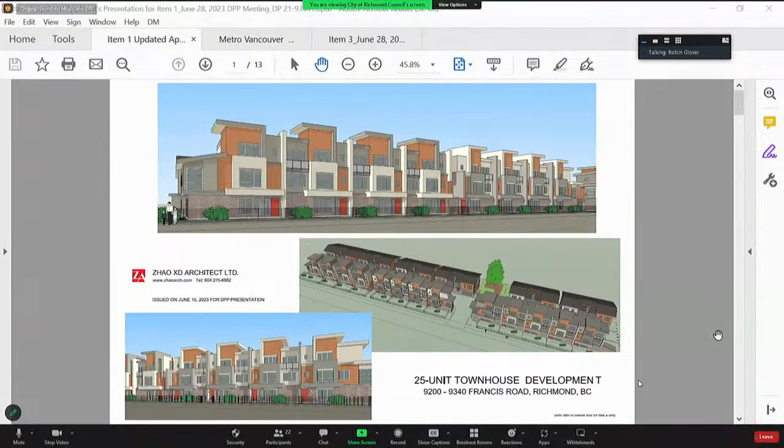Yes, this is a 25-unit townhouse development facing Francis Road, an arterial road. A driveway access is directly from the street, connecting to an east-west internal driveway. The entry driveway lines up with Heather Street on the north, across Francis Road. There are 9 buildings: one is 5 units, 2 buildings are fourplex, and 6 buildings facing the rear yard are 2-story duplex buildings, with proper setbacks and building heights to match the single-family neighborhood on the south. The rear buildings adjacent to the single-family neighbors are designed at 2-stories within a 7.5 meter distance, creating a good transition between the development and the single-family neighbors. A sun shading diagram was made to ensure there's not a big impact on neighbors, and there will be quite a lot of sunshine for the outdoor amenity area of the development.

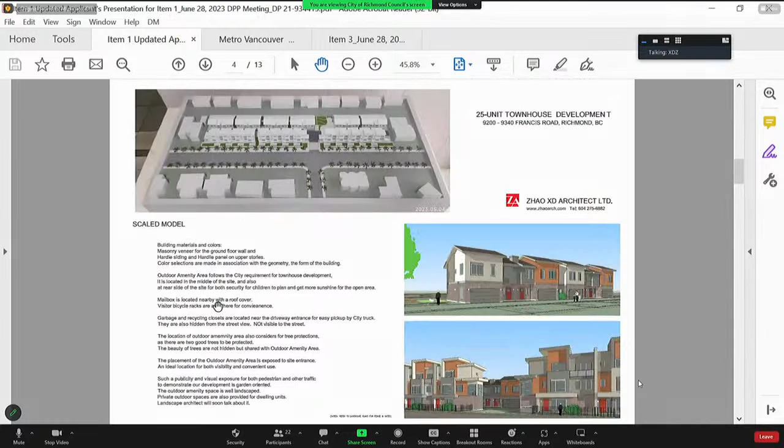The architectural character matches the existing neighborhood, emphasizing the residential building character in both building massing and details. This is a model, the scaled model. We're doing studies for the massing. That's the material we're using.

We introduce also some masonry and Hardie products, so it's a mix for the composition. This is the facade, the front facade.

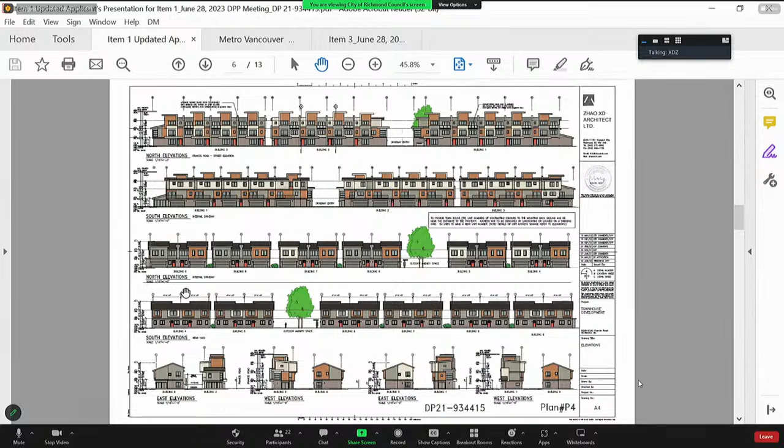Repetition of the units as well as variation to add some breakups to the repetitions. Repetition of the townhouse units allows the function to express the function of the building. It also creates a rhythm of architecture expression along the street front. Variations with different color and change of detail are well considered for this exterior street frontage. The upper portion of the building and the roof line follow the same design expression with repetitions and variations, for both the rhythm and some breakups for interest.

We did some shadow studies. This is the shadow. We make sure there's no big impact to the neighbors, and it's good. We receive all sunshine within the development site, particularly for the amenity area, so we have quite much sunshine.

Building material. Building materials and colors will include masonry veneer for ground floor walls, Hardie siding, Hardie panels on the upper story. Color selections are made in association with the geometry, with the form of the building.

The outdoor amenity area follows the city requirements and guidelines required for the townhouse development. It is located in the middle of the site, also at the rear side of the site for both security, for children to play, and to get more sunshine for the open area. The mailbox is located nearby with roof cover above.

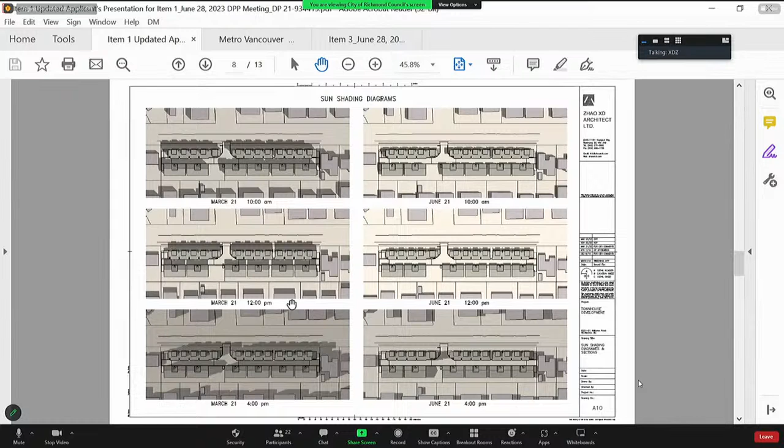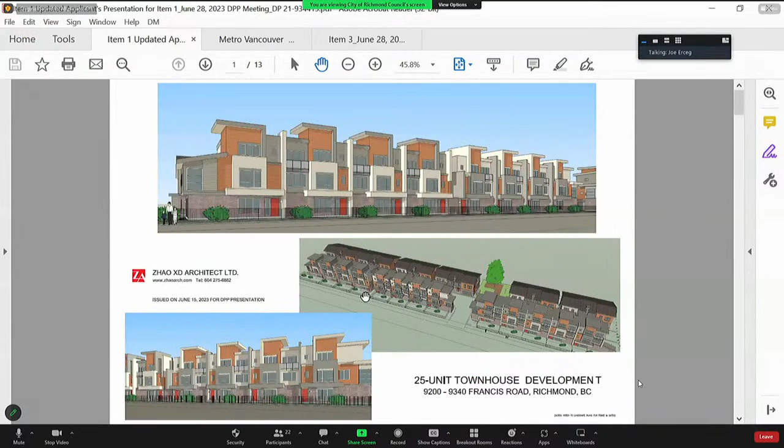This is the first page, referring to the first page. I would appreciate if, when you're talking about the amenity area, you show us a site plan showing the amenity area. When you're talking about tree retention, show us where the trees are that are being retained, and not be jumping around showing us images we've already seen.

Yes, it's here. This week we spent quite much time to protect and preserve these trees. Also with the engineering, as we had an issue because of the upgrading of the utility easement, which impacted the protection of the trees. So we incorporated with the city engineer and used special techniques, and we can still have these trees well preserved, also with the expertise of the arborist. So these trees are defined very clearly with the fence and in association with children's play equipment, to make sure the tree roots will be protected. This will be presented by the landscape architect later on.

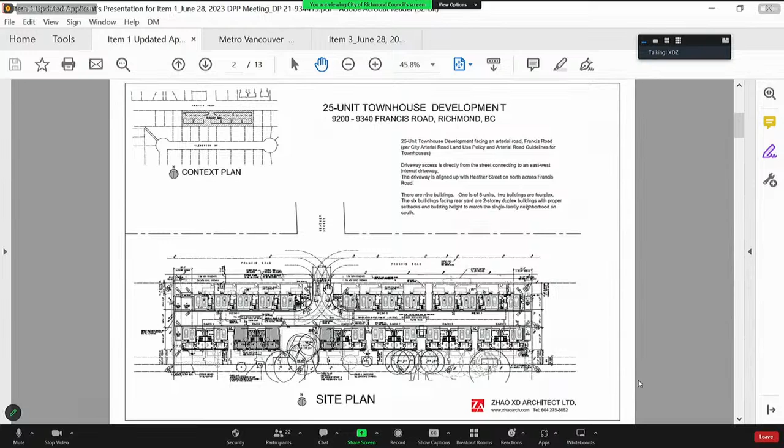Yeah, okay. So does that conclude your part of the presentation?

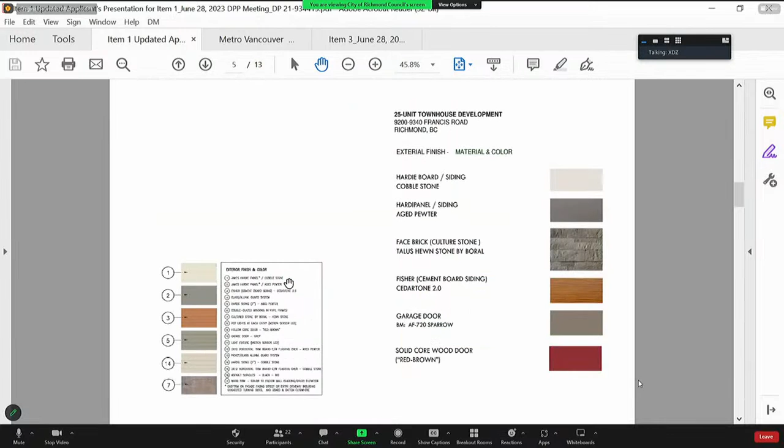Okay, thank you. We do have a pretty comprehensive staff report that outlines all of that. My suggestion for future presentations would be to align what you're speaking to with the images you're showing at that time. Yes. Thank you. Thank you.

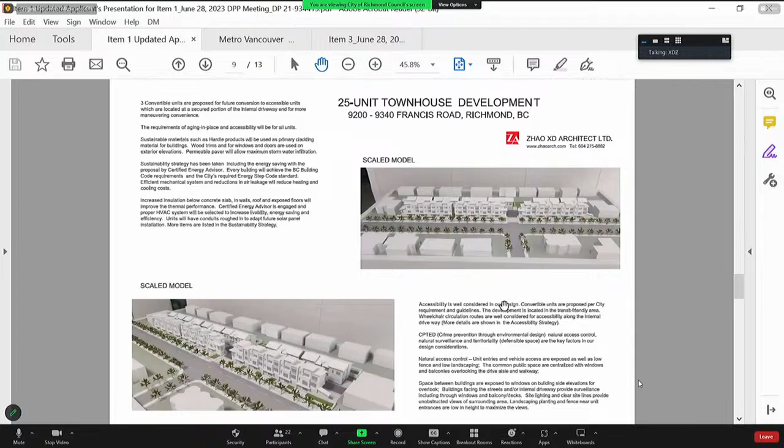This is a townhome development project. The first thing we are thinking is the street-oriented unit, how to provide a decent amount of space for each unit, like the 2.4-meter wide patio, the large open space, and the buffer planting between the frontage fence and the sidewalk.

The second major thing we look into for this project is tree protection, because on the south side of this development we have a whole bunch of very large existing trees. We will try to protect and preserve them, working together with the project arborist and the city staff.

Also, because this is a development project, we need to provide age-friendly amenity space for the residents. 50% of the amenity space is dedicated to play area. We worked with the project arborist to get a robust play structure on the side, but also away from the critical tree zone, so it's not affecting the existing trees.

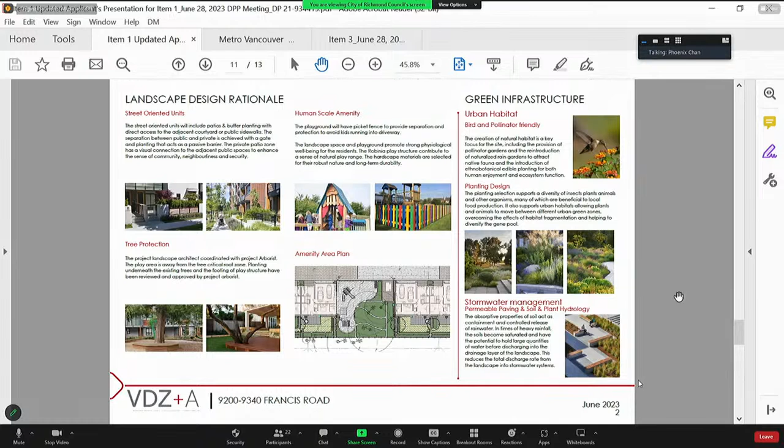You can see some precedent images for the entry pathway, and some feature paving for the patio, for the entry, and some areas between the houses. They are kind of dark, but we still try to propose some landscape features like boulders and river rock as decoration.

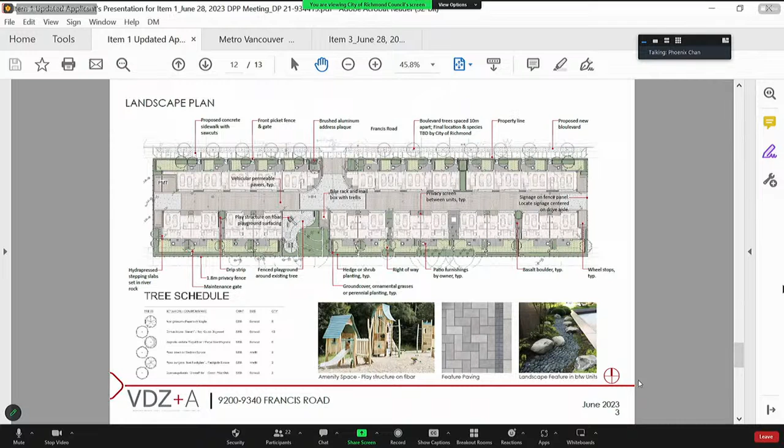Next slide, please. This is some of the precedent imagery we proposed for this project - the paving material and bike racks, the lounge seating, the trellis, and the entry signage you can see in some of these pictures. We also have a planting palette, which we coordinated with the horticulture technician to ensure biodiversity and bird and pollinator friendliness.

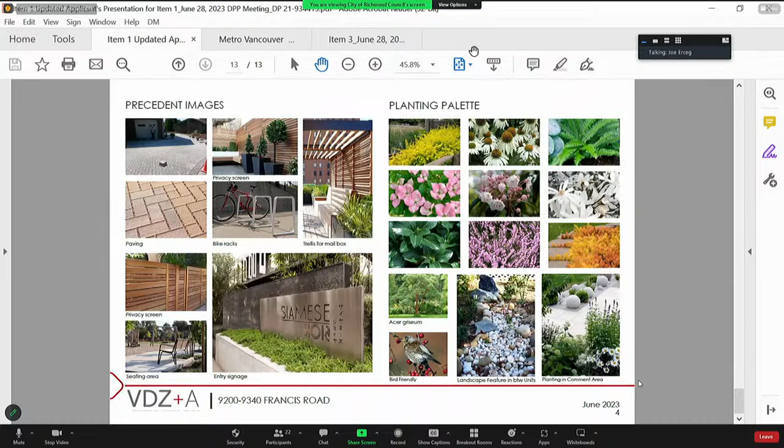That's all for the landscape. Thank you. Okay, thank you for your presentation. Are there any questions for the panel? No. Okay, Mr. Craig, do you have staff comments for us?

Yes, thank you, Mr. Chair. Just a few comments. There is a servicing agreement associated with this project. That servicing agreement involves frontage works along the arterial road, city utility upgrades as referenced during the presentation. The utility upgrade along the rear of the property involves special techniques being used in order to save the trees along that rear property line.

The servicing agreement will also provide for site services. The driveway will be secured by way of statutory right-of-way in order to provide future access to adjacent sites should they redevelop in the future. There are 9 trees being retained as part of this development - 3 in the outdoor amenity space and 6 along the rear property line.

The development is being designed to achieve energy level step code 2, with the introduction of low carbon heat pumps for heating and cooling of the residences. There are also 3 convertible units included in the project. Happy to answer any questions. Okay, thanks. Are there any questions for Wayne?

Cecilia, I haven't heard anything about the lighting for this development. Can somebody just address that? And secondly, just a comment - I heard the landscape architect say we're going to try to protect the trees. No, you have committed to protecting the trees, so please do more than try. Yes, sorry, we are protecting that. Thank you, and somebody talk about the lighting, please.

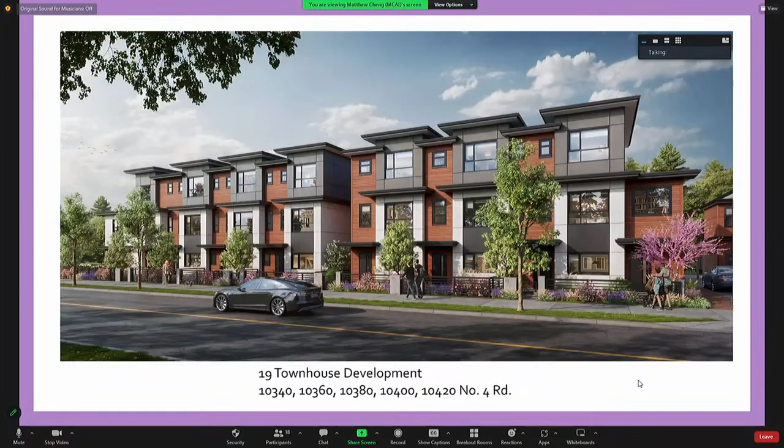This is a 19-unit townhouse project, and the site is composed of 5 lots from 10,340 to 10,420 number 4 road. This site is located at number 4 road, only about 250 meters from Steveston Highway.

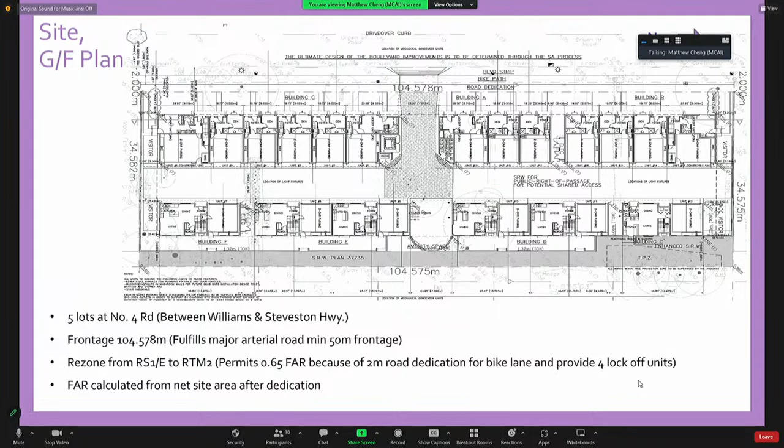We are proposing to rezone from RS1E to RTM2. The permitted FAR is 0.65 based on the net site area after 2 meters of road dedication. We are proposing FAR of 0.649.

Since this section of number 4 road is classified as bike route, 2 meters dedication is required along the frontage of number 4 road in the light purple area on the slide. There is an existing 3-meter SRW on the east property line, indicated by the light blue color on the slide. The 3-meter SRW is enlarged to 6 meters at the northeast corner, indicated by the dark blue color on the slide.

This is for rerouting the utility from the original 3-meter SRW in order to save trees on the neighbor's side to the east, where the tree protection zone is within the 3-meter SRW.

Sorry, let me go back to my previous slide. You modified the SRW to protect the trees on the neighbour's property, is that right? Yeah, you can see this dark blue area, and there are some trees where my pointer is pointing. So we are rerouting the utility in order to save the trees on the neighbor's property.

And following on this slide, we are providing a cross-access easement to the property to the north, since the residual lots designated as townhouses could not fulfill the minimum 50-meter frontage requirement, shown on the right-hand side of the slide.

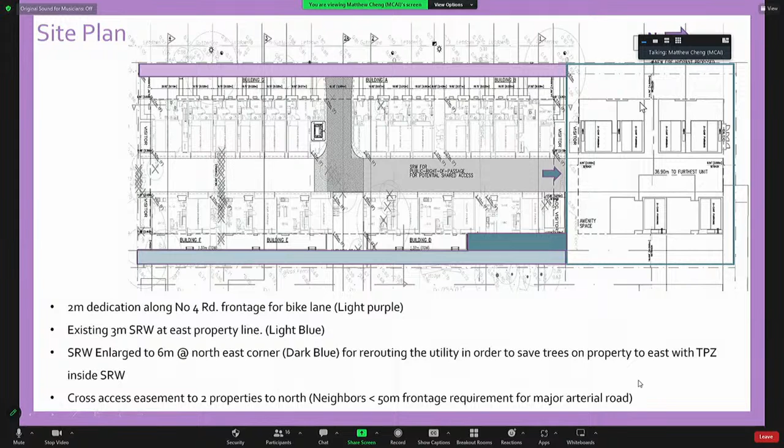We are proposing 19 townhouse units in front and back rows. There are 3 buildings in the front row and 3 buildings at the back. A 4.5 meter setback is provided after dedication for the front yard, with a 6 meter rear setback and minimum 3 meter side setback proposed, fulfilling the arterial road townhouse guidelines.

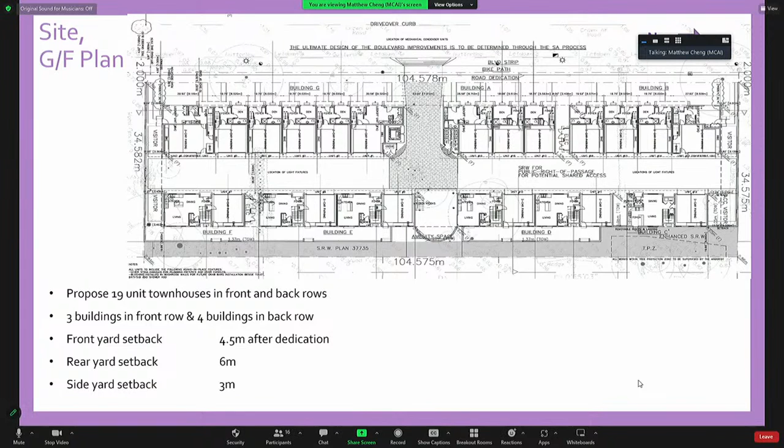The 3 buildings in the front row are composed of buildings with 4 units, 3 units, and 6 units, in order to create a variation of building mass along number 4 road.

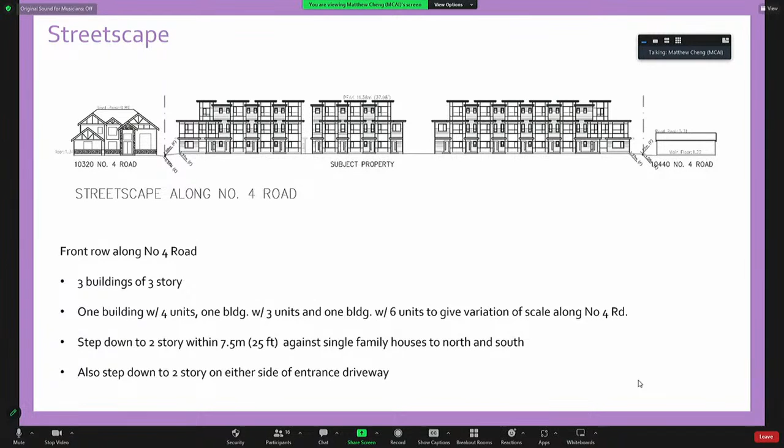The front buildings are 3-story, but step down to 2-story against the existing single-family houses to the north and south of this development. Within 7.5 meters to the side property line, the buildings have only 2-story building height. The buildings are also stepped down to 2-story on either side of the entrance driveway.

The 4 buildings at the back row are composed of 2-story duplexes, 2 buildings of duplexes, and 2 buildings of single-unit buildings. All the rear units are 2-story, giving a good transition in building scale to the single-family houses behind the property.

Wall mount light fixtures at the top or side of the garage door are provided to give lighting for the driveway.

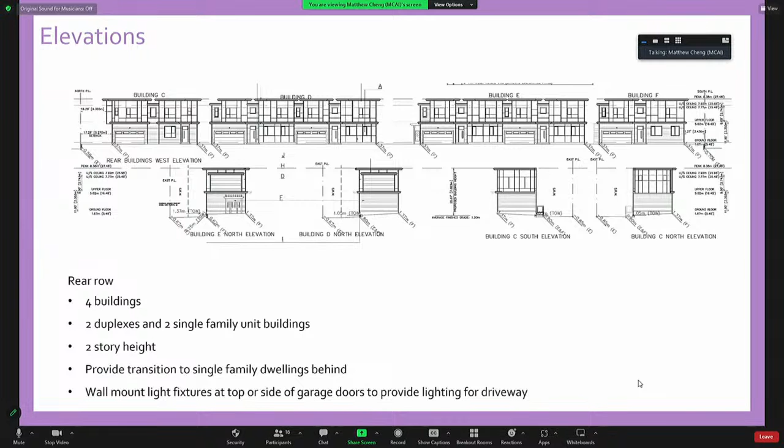Decks are provided on the second floor of the front building's living room, on the driveway side, to fulfill the unit outdoor space requirement of 30 square meters together with the front yard outdoor space.

The top floor is set back 1 foot from the second floor to reduce the building mass as seen from number 4 road.

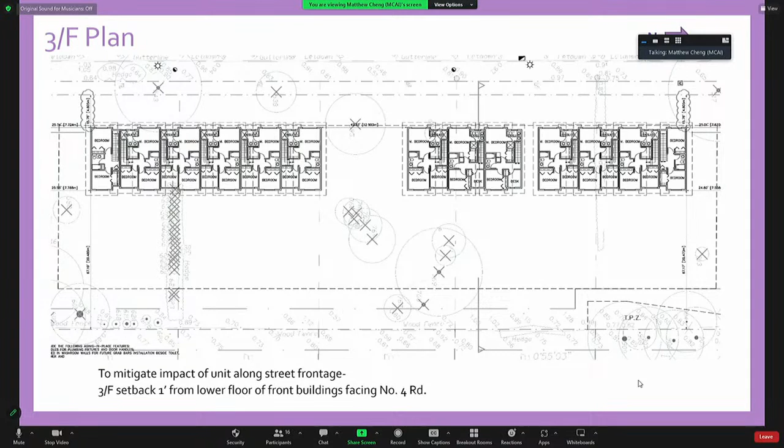Regarding the grading of the property, the main floor elevation of all units is set to be 0.3 meter above the ground of number 4 road. The finished grade is sloped slightly from the building to number 4 road and to the north and south property lines, so no retaining wall is required on all 3 sides.

However, the finished grade on the east property line is 0.6 to 0.7 meter above the rear yard of the single-family houses to the east. Also, the grade of the 3-meter SRW adjacent to the east property line could not be altered, and there are trees and a tree protection zone within the SRW.

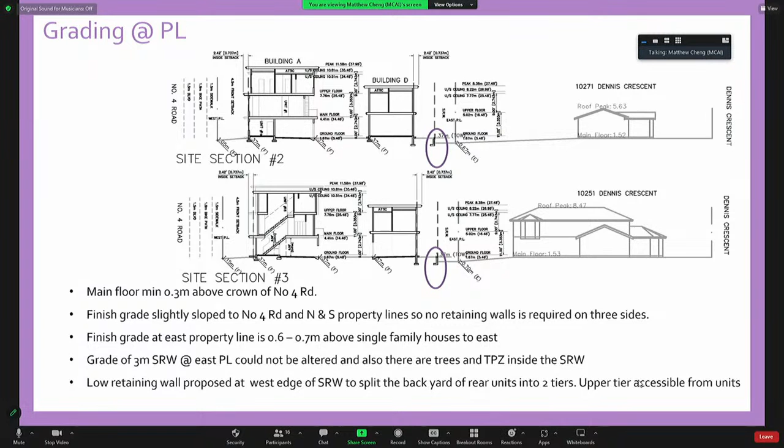Therefore, low retaining walls are proposed at the west edge of the SRW to split the backyard of the rear unit into 2 tiers. The elevation of the upper tier will be compatible with the interior space, making the unit more accessible to the upper tier of the rear yard.

2 indoor accessible parking spaces are provided in both convertible units. 36 indoor bike spaces have been provided in the garages, beyond the 24 space requirement based on 1.25 per unit. 4 outdoor bike racks have been provided in the space between buildings C and D.

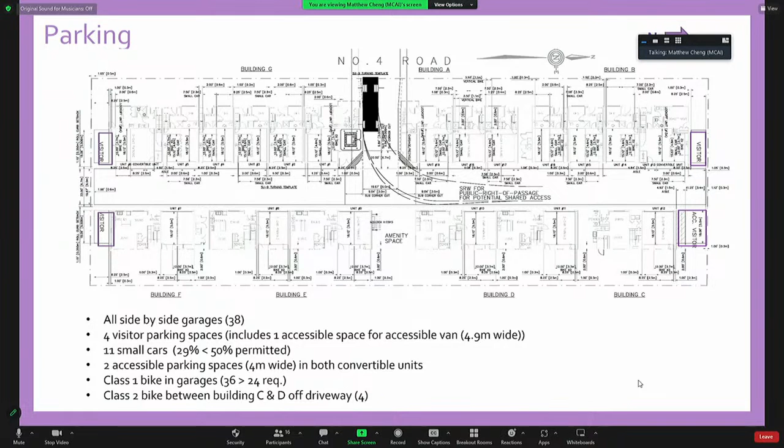This fulfills the 0.2 space per unit requirement. The provision of SU9 turning has been provided. The PMT is located on the south side of the site entrance driveway, and the location has been approved by BC Hydro.

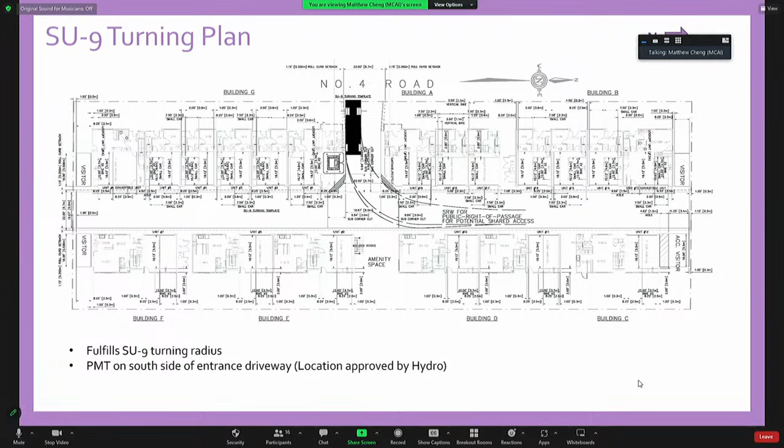A new hydrant is proposed on the south side of the entry driveway. The distance from the hydrant to the fire truck is 45 meters maximum, and from the fire truck to every unit entry door is 45 meters maximum too. The distance is measured in a line parallel to the driveway, not diagonally.

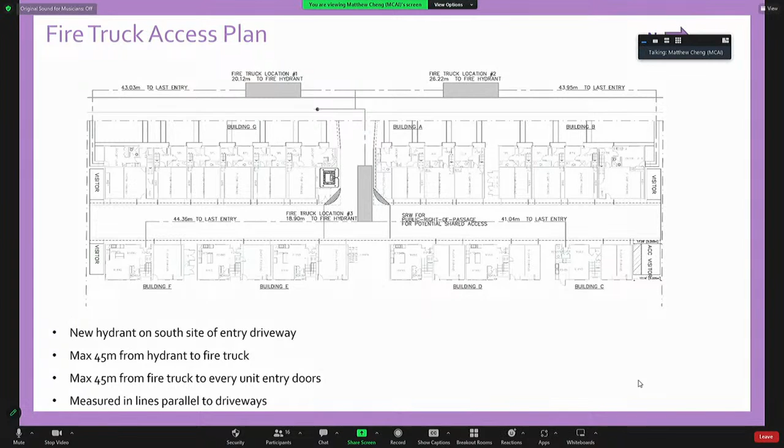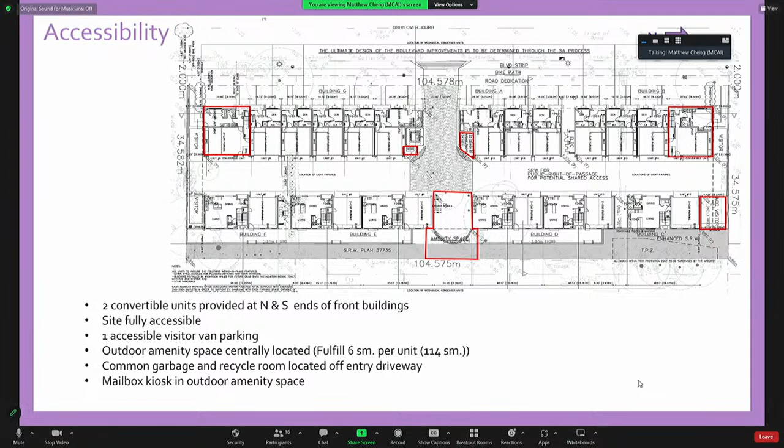Regarding convertible units, there are 2 convertible units at the north and south end of the front building, and the units fulfill all convertible unit guidelines. The accessible bedroom is located on the 2nd floor. The whole unit from ground floor to 3rd floor is accessible by a platform-style chairlift, which could carry a wheelchair between floors. Other features, including door widths, washroom, kitchen, windows, and outlet switches, will be provided as per convertible unit guidelines.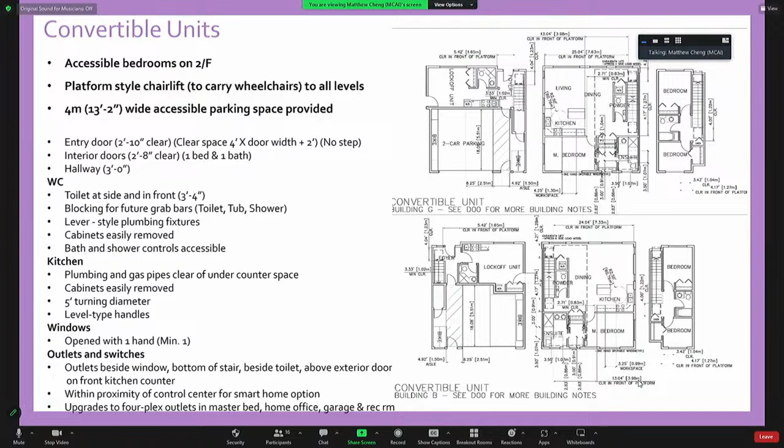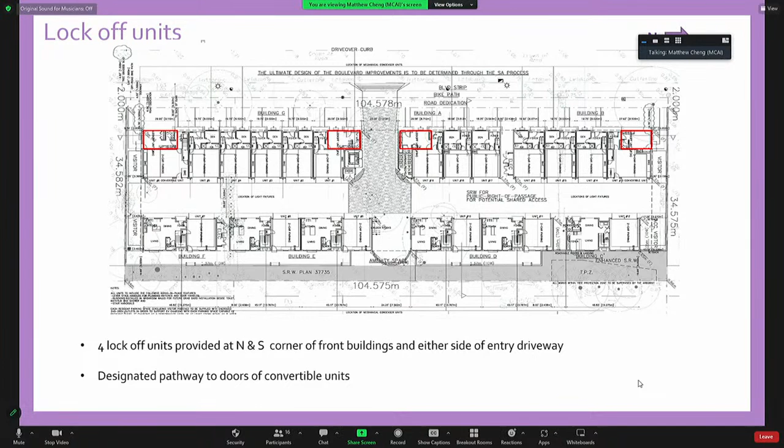There will be 4 lock-off units. 2 units are located at the north and south end of the front building, and also 2 more units on either side of the entry driveway. The lock-off units fulfill the minimum 25 square meter requirement, and the layout includes bathroom, kitchenette, sleeping area, and a desk. Also, stacked washer and dryer are provided at all lock-off units.

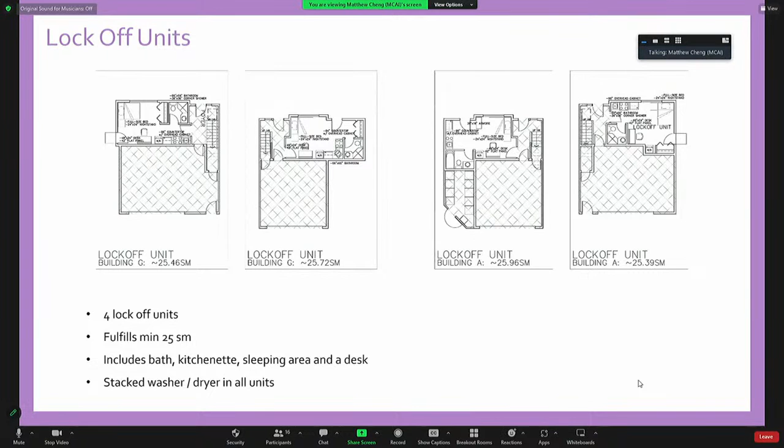Regarding sustainability, Step Code 3 will be required and provided. A certified energy advisor has been retained, and an air source heat pump will be used and designed by mechanical engineers. The location of the outdoor unit of the air source heat pump has been proposed, and screening will be provided by a high quality 3'6" tall aluminum Knotwood fence, which is removable for maintenance of the machine.

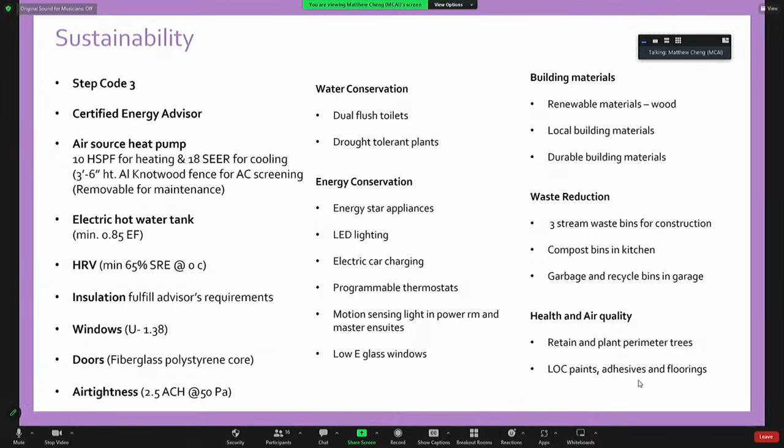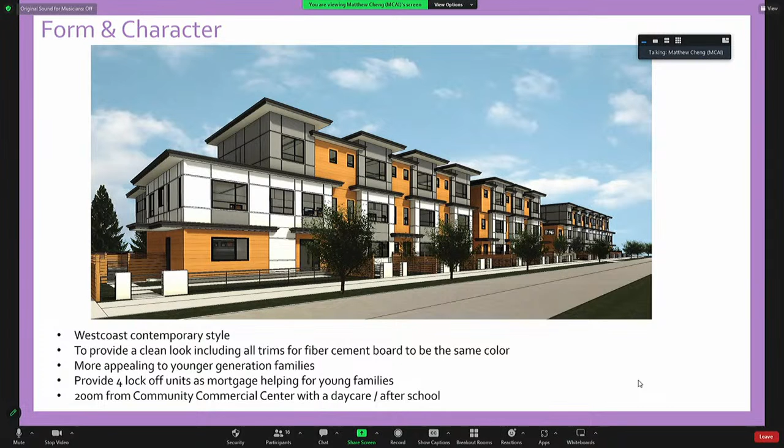Regarding form and character, it is West Coast contemporary style. This style is achieved by providing a clean look, including all trim for fiber cement board to be the same color as the cement board. The developer believes this architectural style will be more appealing to the younger generation family, which are the target buyers for townhouses in this section of No. 4 Road.

Affordability is important for the young family. That's why we have provided 4 lock-off units, which could be important for mortgage helping.

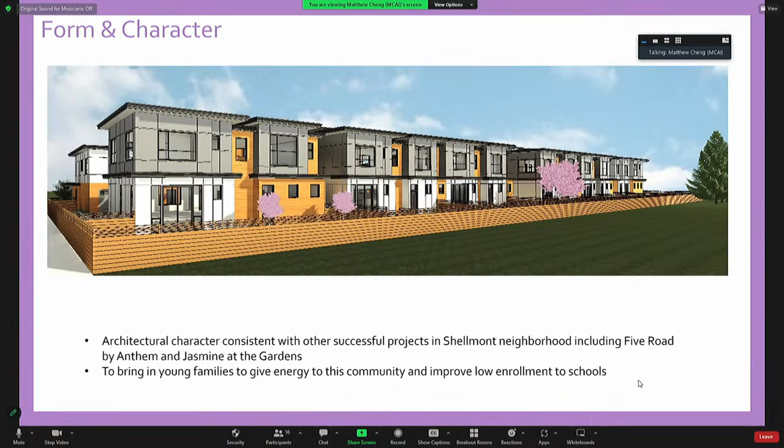The site is located within 200 meters from a community commercial center, where a daycare or after school program is located at the corner of No. 4 Road and Steveston Highway, which could be a favorite for young families. We believe this design will improve the future elevation of this neighborhood in a more sustainable way and bring in young families to give energy to this community.

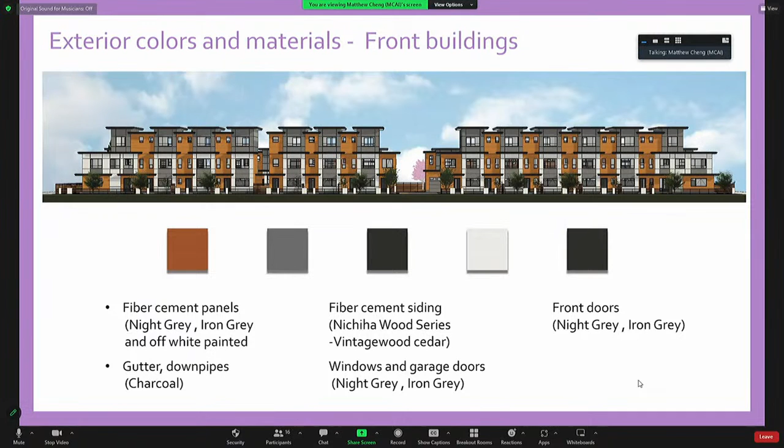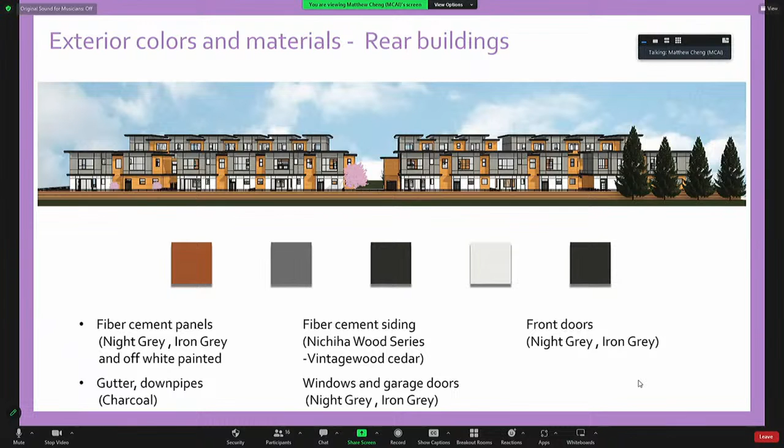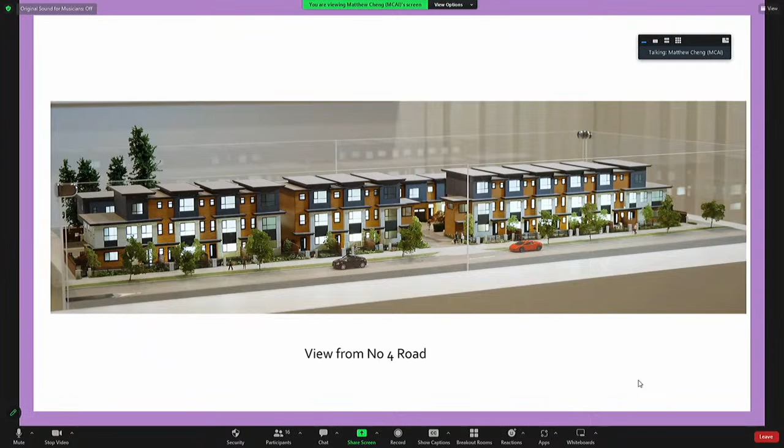There are some model views of the project. This view is from No. 4 Road of the overall complex from the northwest corner.

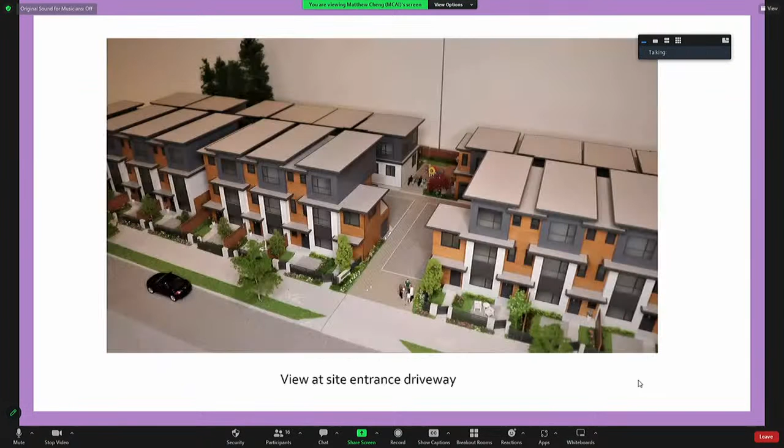This is the view of the entry driveway to the complex. This is the view of the model at the southwest corner from No. 4 Road.

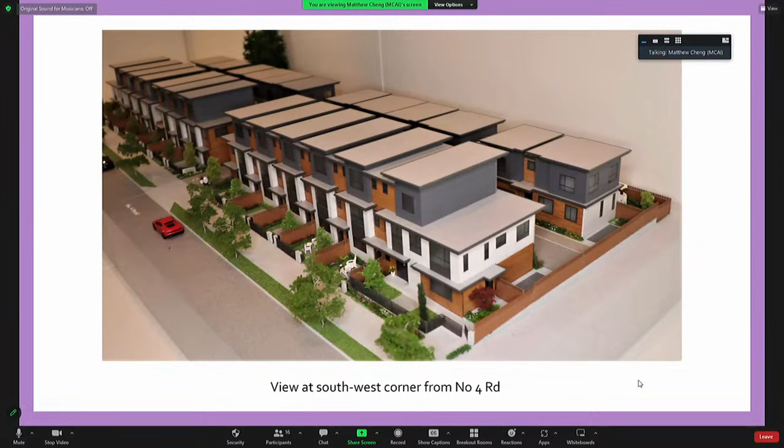This is the view of the model from the southwest corner from No. 4 Road. And the last picture is the view of the internal driveway from the southeast corner. So this ends the architectural presentation.

I will pass it to the landscape architect.

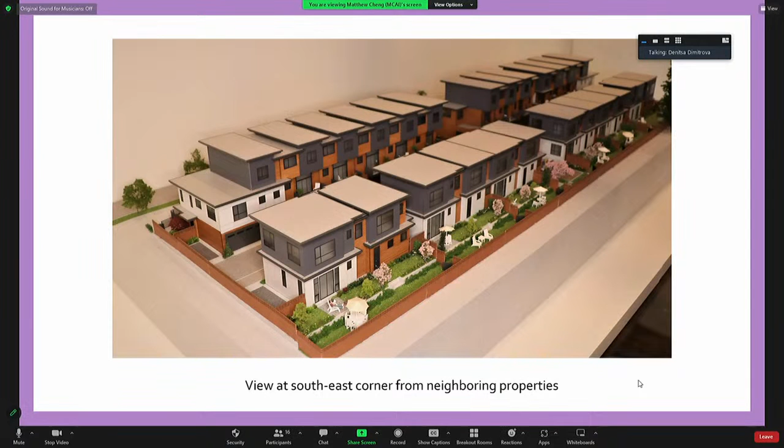Thank you. Thank you for a comprehensive presentation. That was appreciated.

Good afternoon. My name is Denitsa Dimitrova, PMG Landscape Architect. Our address is 4185 Still Creek Drive, Burnaby.

The landscape for this project has been designed to incorporate 4 existing offsite trees at the east north corner of the site. We are proposing 2 existing trees to be preserved and relocated once the arborist confirms it's appropriate.

Each unit has been provided with private yards with patio and landscape for all units along Number 4 Road, and patio and open lawn areas for buildings along the east property line. These contain shade trees, and the landscape will include shrubs, grasses, and perennials.

Privacy from adjacent properties has been provided with a 6-foot wood fence along the east property line and a 4-foot wood fence on top of small retaining walls along the north and south property lines.

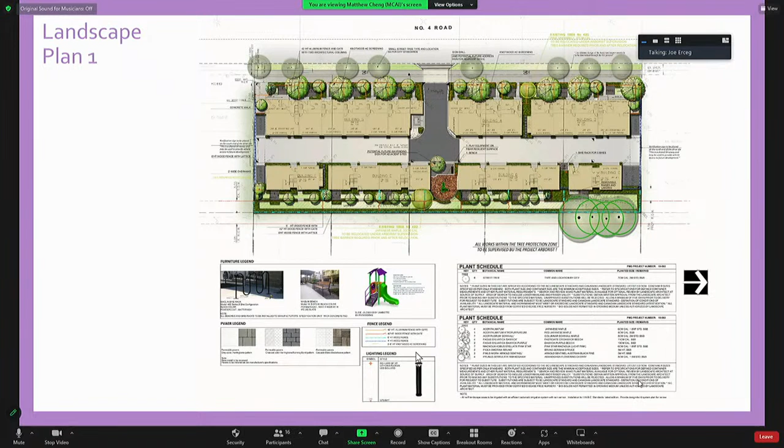Okay, Milton or Cecilia, do you have any questions for the applicant team? Just one, on the heat pump — I heard that you're doing air source heat pump. I assume it will meet the noise requirements because some of them could be somewhat noisy. Yeah, that's correct, we have an acoustic consultant on board to look at the dB for the machine.

So is it a ground source system or individual air source pumps? It's an air source system. So each unit — how does that work, how many units are there? Each unit has one machine, and it works individually.

So where are they going to be located? As mentioned, some are located in the front yard, but they are totally screened by a high quality fence that can be removable for future maintenance. Okay, so they're near the front property line somewhere? Yes, that's correct — not on the property line, but in front of the building. Oh okay, close to the building. Yeah, that's correct, more precise.

Sorry to jump in on your question, Cecilia, but thanks — sometimes I worry with so many of them that they're going to create noise in some of the public spaces or for other people, maybe existing neighbours or that sort of thing. But it sounds like you've given it a fair bit of thought.

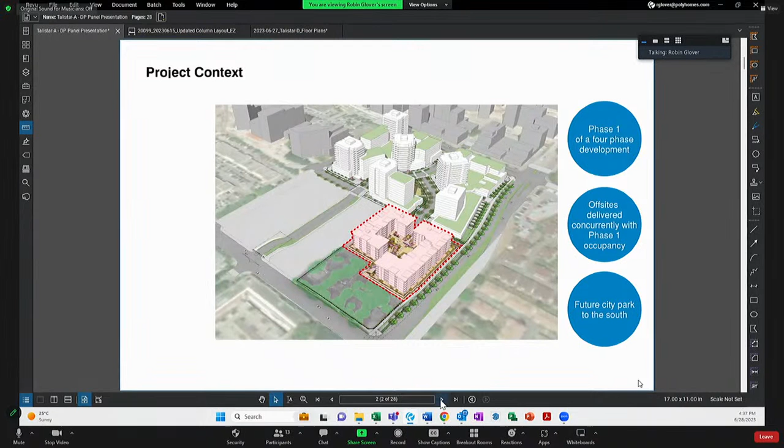are working away on the final phase over here. As part of our servicing agreement application, all of the perimeter offsite works on the 4 perimeter roads, Sexsmith, Capstan, Garden City, and Cambie, will be completed with occupancy of the first phase here at this Talistar A project. And we have also, now that we've been through the rezoning and subdivision process, turned over this portion of land here, which is designated as a future city park, and we have entered a separate servicing agreement to complete that work there as well. So that's kind of setting the table for the project.

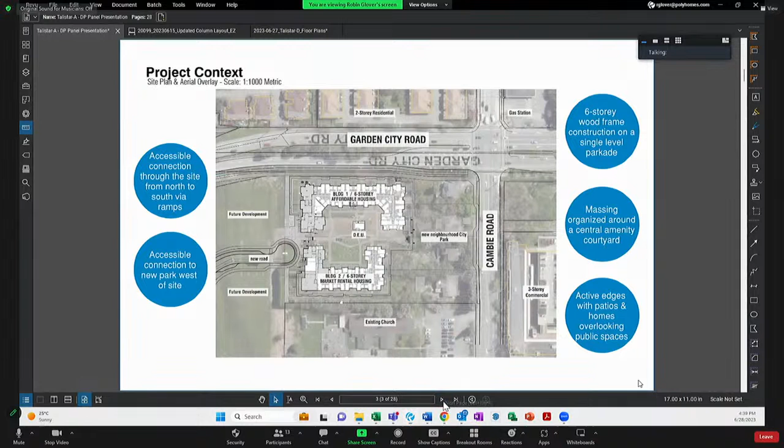So the building on the top of the page is the East Building, Building 1. It's an affordable housing project. There are 156 affordable rental homes in this building. The building on the west, which is at the bottom of the page, Building 2, is market rental housing. There's 120 market rental homes there.

And you can see by this diagram on the north side, all the indoor amenities are close to the entries. On the north side, which is the left, you can see the new road coming in from the left. That cul-de-sac provides access to both buildings, so the lobbies for building 1 and 2 are close to that access point. Then the amenities are surrounding those entries.

The parking access comes from the cul-de-sac. It comes down, as pointed out here, and the loading and garbage staging area is in that zone right there. All these homes will meet the Richmond Basic Universal Housing Standards, and the pathway leading from the cul-de-sac from the north to the south park will be accessible via this ramp that's shown on the south side, as pointed out.

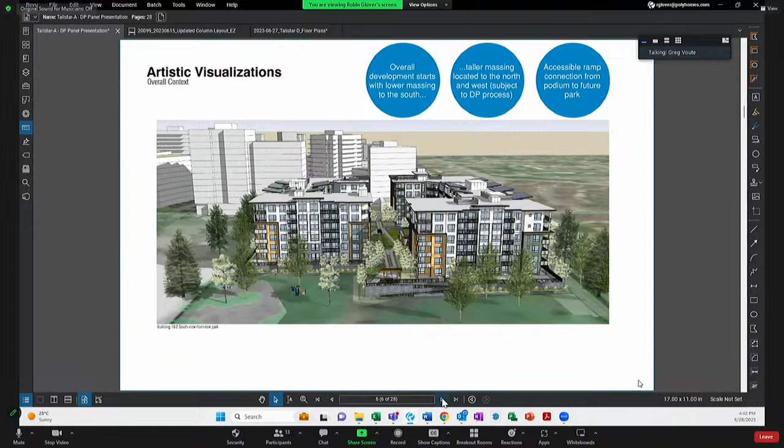So the parkade, like a lot of buildings in Richmond, is partly out of the ground because of groundwater. So we have essentially a 6-story building, around 18 meters to the standard roof height, with some pop-ups that come up to 20 meters. And then there's this parkade.

So we've hidden the parkade with landscape walls at half height and dressed those planters up with amazing landscaping and trees in front, and more will be shown in the landscape portion.

The roof pop-ups are marching along the facade in all directions to give articulation on the roof, and they relate to the stepping in the building.

In a comfortable and visually pleasing way. The other thing is the DEU, or the district energy plant, is in the center courtyard in this case, and it adds animation to our courtyard, and it's above the floodplain, so it's ideally located to optimize the courtyard spaces and provide interest. Next, please.

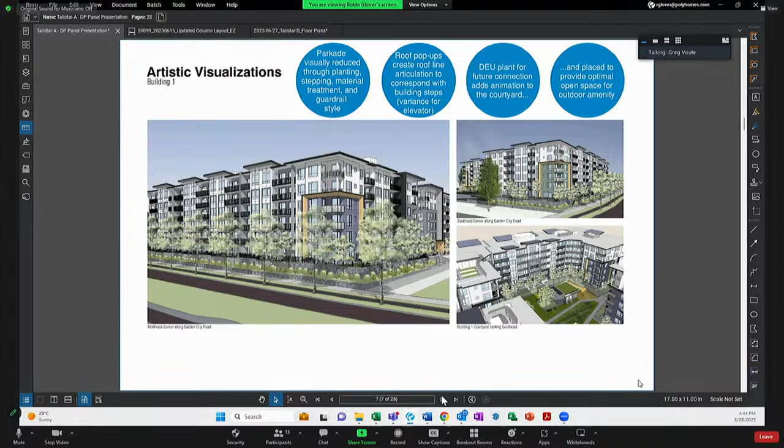Our color scheme is essentially driven by lighter colors at the top of the building and feature colors at the corners. As can be seen here, we've got blue, green, and yellow, and I'll show you later how that relates, but it's essentially a light colored building with a dark base.

The materials vary from the feature wood cladding, wood look-alike, because this is a non-combustible building - not real wood, but it looks like wood. There's fiber cement and fiber cement boards that are used. There's light panels, glass with a frit pattern we'll get into later. And the windows have various frame colors, white and black.

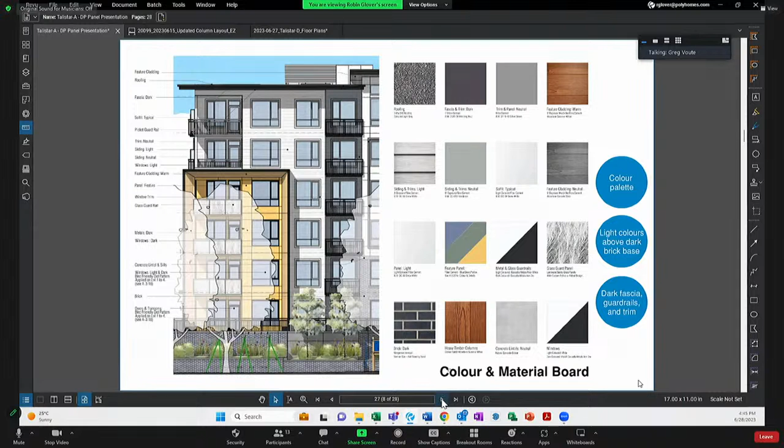Next slide, please. This shows a typical corner feature with our accent color and the grass pattern that's going to be a frit pattern on the glass for the corner balconies, the features. And it's bird friendly - we're using that bird friendly pattern on all the glazing. I believe it's below a certain level. Off the top of my head, I can't remember what they were, but it's on the drawings. The frit pattern will be used as required.

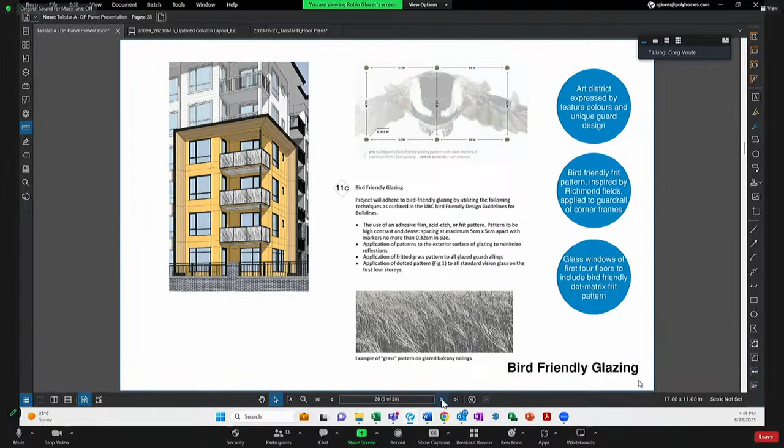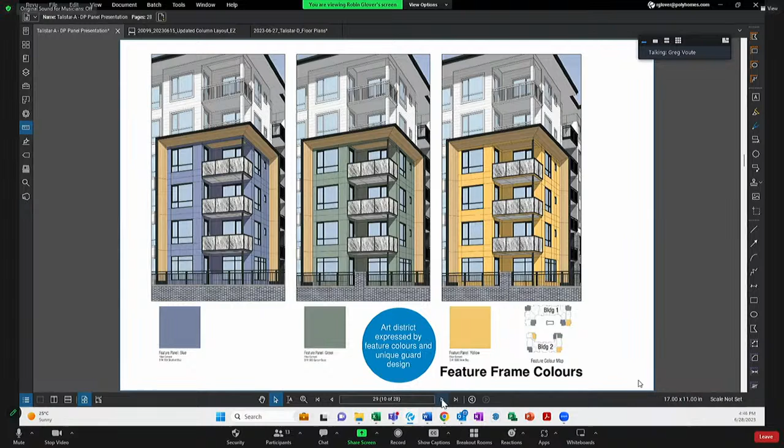Next slide, please. You can see by this diagram the variety of color, and this is in part an expression of the art district and to create variety and interest in the architecture. The small diagram, the key feature on the bottom right, gives you an idea of how the colors are arranged on the buildings - there's a yellow corner, a blue corner, a green corner, kind of going around the buildings.

Next. This is a detail of the entries, and it shows how it's a contemporary style entry. It's got some clean wood colored materials that give it warmth, and it'll have glulam beams and posts, which will really stand out as features to the entries.

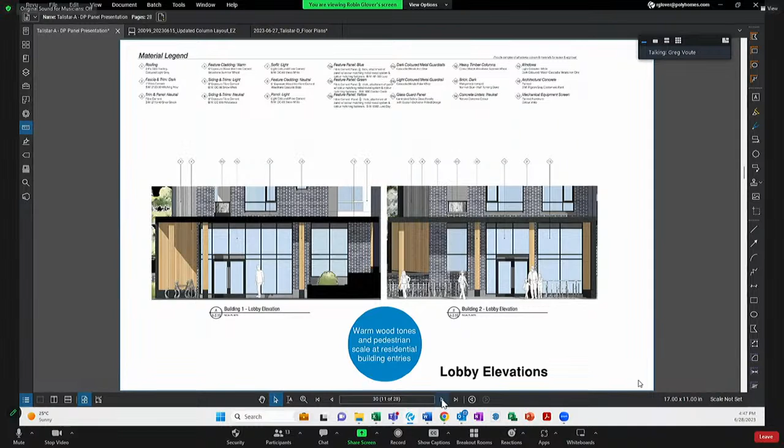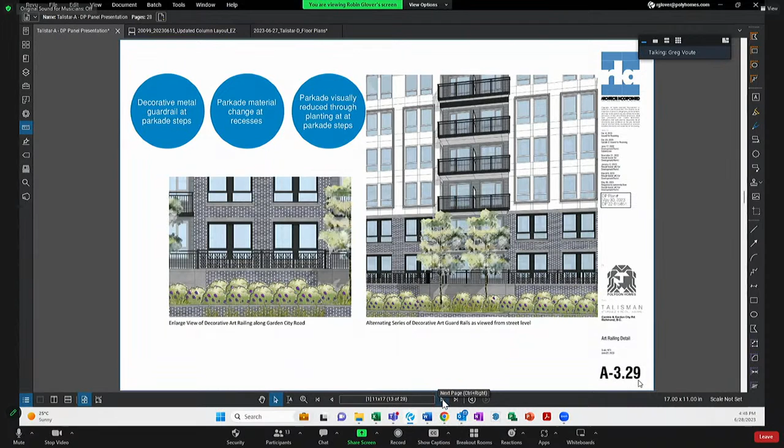Next slide, please. And I'll hand it over to Jergus.

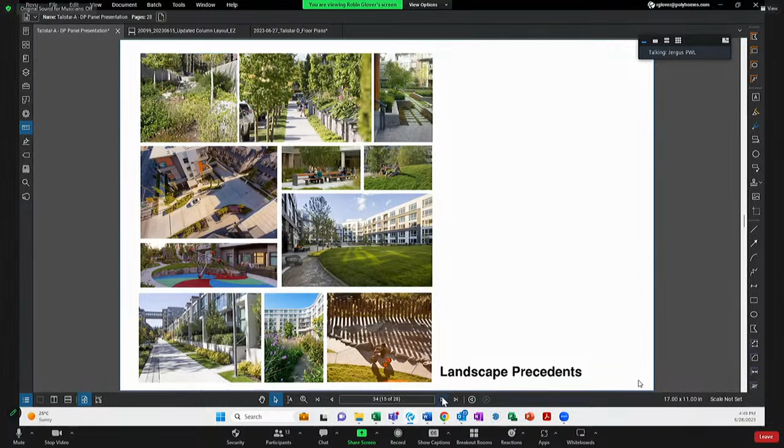The materials along Garden City Road are characterized by cast-in-place concrete sidewalk, planted boulevard with trees, and a separated bike lane. The pedestrian character is enhanced by robust planting and the two-tier walls that Greg already described.

The two-tier walls were discussed in depth with the city staff, and the heights have been established to benefit the pedestrian experience and also to hide the parkade wall.

Moving to the north side of the project, the SRW connects the east and the west of the site and leads you into the entry of the project.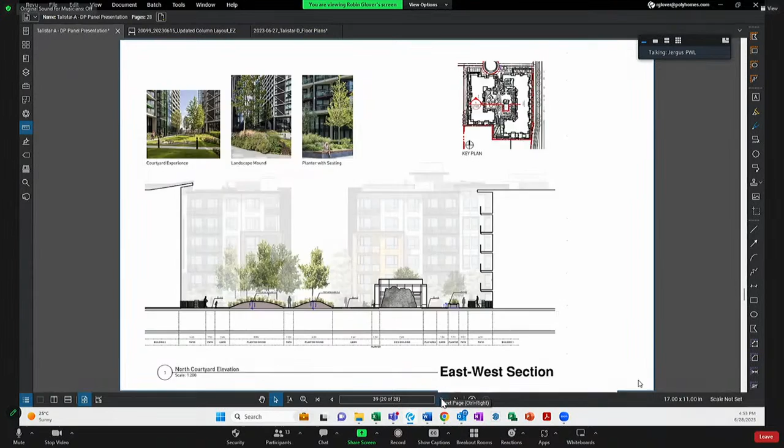Here, further sections describe the character of the trellis, how it overlooks onto the future park that will be on the right-hand side, and relationships of the two-tiered walls with the streetscape along Garden City Road and along the west side at the parkway.

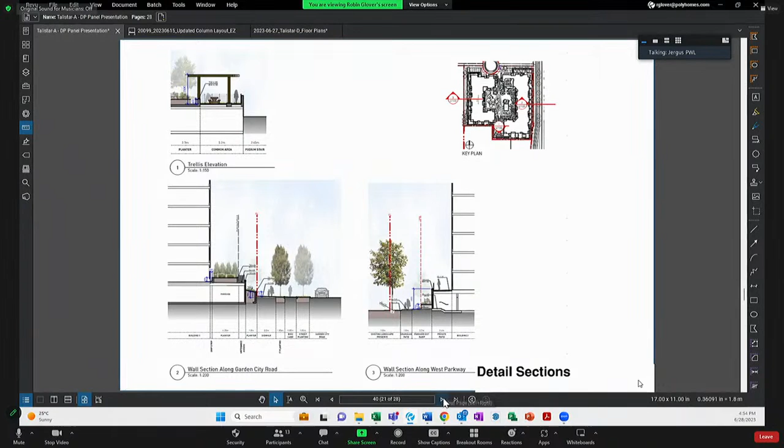I think this summarizes the landscape, and if you have any questions, just let me know.

Thank you. Okay, thank you for the presentations. Let's see if we have any questions. Cecilia, Milton? I have a question, if I may.

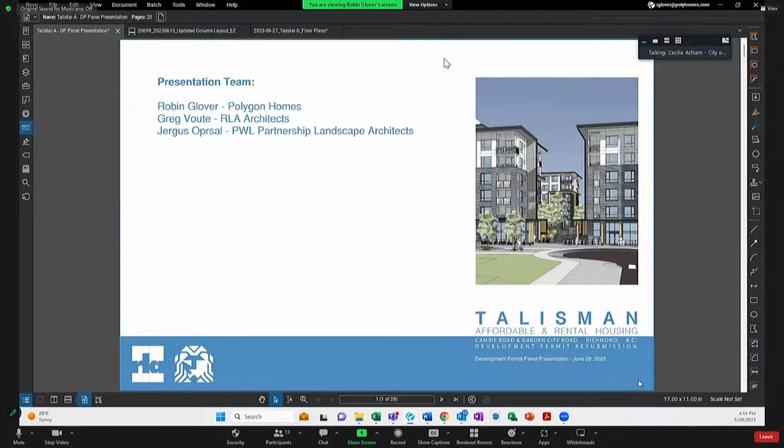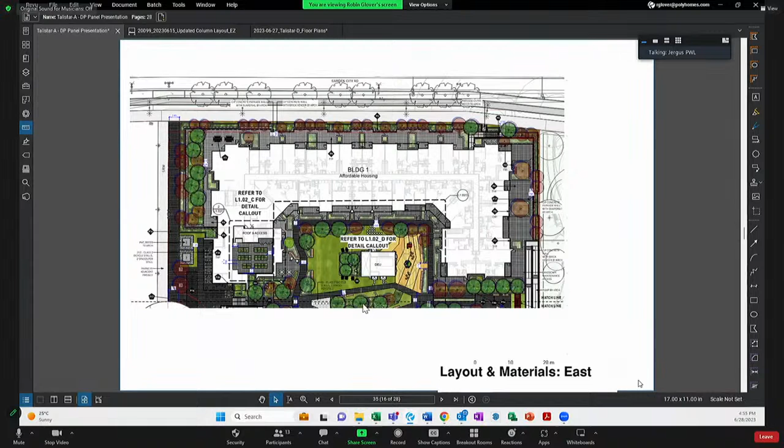The internal walkway that joins the park to the cul-de-sac, is that intended to also be available to the neighborhood, since you have a walkway along the side of the property? Yes, there are no gates, this is open to everyone. There is a staircase, which may seem like a barrier, but there's also a ramp, so people can choose to walk through the courtyard or around the building.

Okay, thank you. Following that, my concern is from a safety perspective. It's very good, lots of eyes on the podium for the internal facing units. A small concern is that it joins the park with a ramp, and especially at nighttime somebody could go through the park, up the ramp, and do whatever within your property, or use it as another route to escape through the neighborhood. So is there any provision for that, like lighting?

Yeah, absolutely. We are providing lighting along all the landscape walls and the ramp, so this space will be well lit. We are also not providing any openings where people can hide or create mischief. There will be eyes from the residents above and the overall neighborhood.

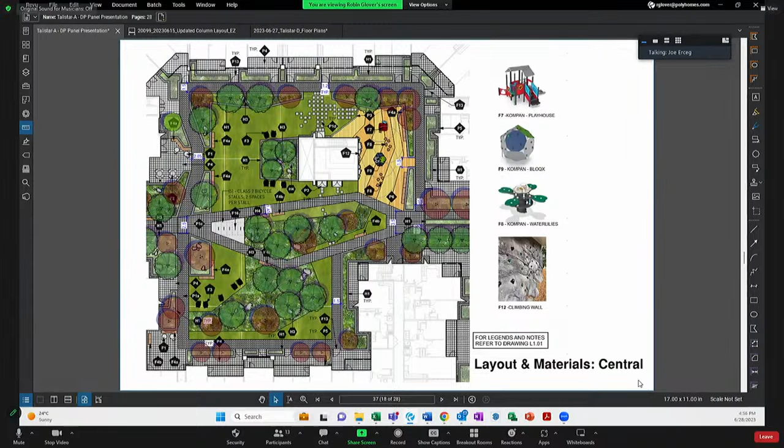Okay, thank you. Okay, great. Milton, anything? I don't have any particular questions, but through the presentations there's obviously a lot of attention to both architectural and landscape details, so I appreciate that. I think that brings us to the staff presentation.

Wayne, do you have comments on this? Just a couple brief comments, Mr. Chair. There is an extensive transportation demand management package associated with this project, elaborated in the staff report, including provision of a transit pass program. I'd also like to thank the applicant for providing a rental project that is 100% universal, with all units meeting the city's basic universal housing guidelines.

There is one variance associated with the project, to provide elevator access to the urban agricultural building, or agricultural deck, on top of the affordable building. The variance is limited to the elevator access for that garden area. Nothing further, happy to answer any questions.

Wayne, on that variance, I don't have a problem with it, it seems pretty localized, but how did it come about? Did we write some comprehensive zone for this site, and did this come about after that, or why are we dealing with a variance?

Through the rezoning process, the applicant did make a commitment to provide a demonstration urban agricultural garden on the rooftop of that deck. When that commitment was made, the rationalization as to how access would be provided wasn't fully designed. As we went through the development permit, that is where the height variance came into play.